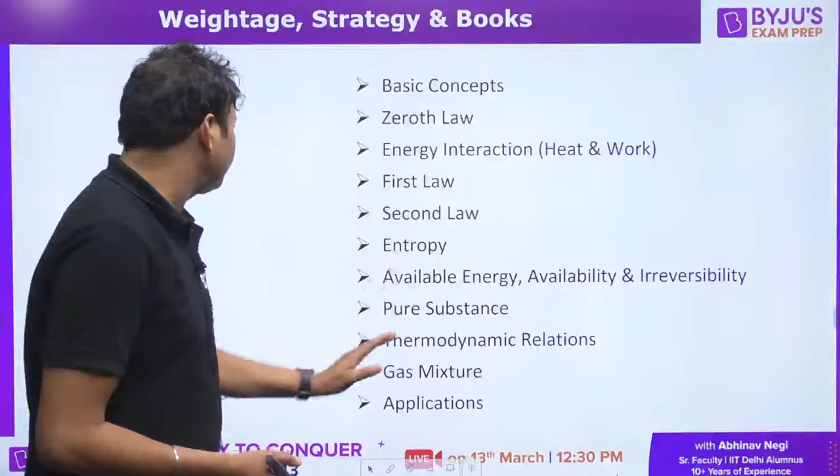Yes, so first of all, I will talk about the reference books which are important for covering your syllabus for the GATE 2023 examination. You must be knowing about these two books, Yunus A. Cengel and P.K. Nag. These are important for basic thermodynamics. But let me tell you, the problem with thermodynamics or the thermal engineering syllabus is, for the engineering services examination, the syllabus is comparatively vast.

Because the application involves different subjects like RAC, power plant, and IC engine. But in the GATE examination, it is only one subject, that is thermodynamics and its applications. So do you need to study the topic RAC from a separate book? Do you need to study IC engine from a separate book? Do you need to study power plant from a separate book? That is the question most students have, those who are preparing for GATE or ESE examination.

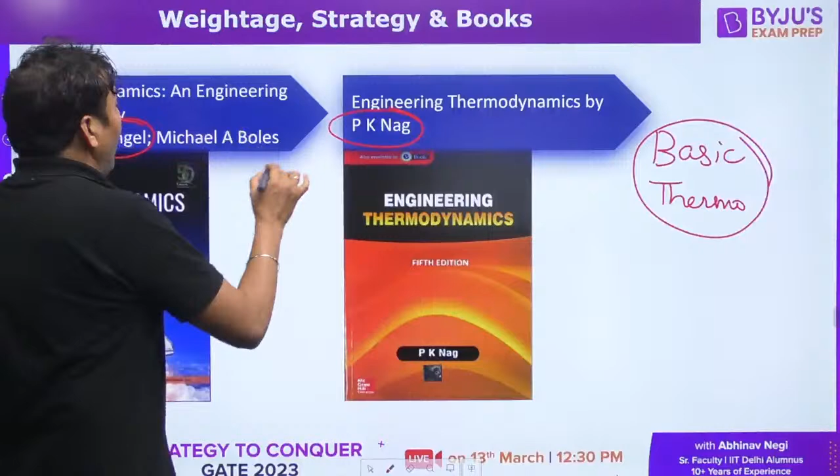Let me make this very clear. Those who are preparing for the engineering services examination need to prepare thoroughly. RAC as a complete subject should be prepared thoroughly. Power plant, IC engine need to be prepared thoroughly. That requires a complete book dedicated to a particular subject, be it RAC or IC engine or power plant. But those who are preparing for GATE examination, no need to waste your time studying RAC from a separate book, or power plant from a separate book, or IC engine from a separate book. My suggestion to everyone is you can use any of these books to cover

basic thermodynamics and applications. Mostly in the application part, the various working cycles are asked, and the rest of the subjects will be covered. There are topics on RAC, the concept of RAC is also there in both of the books. The concept of IC engine is also there. The topic is cycles, various thermodynamic cycles like Otto cycle, diesel cycle, refrigeration cycles, and power plant cycles. So you should prepare for the various cycles in the application part. That is what is covered in these books, right? So do not waste your time having a different book for a different application.

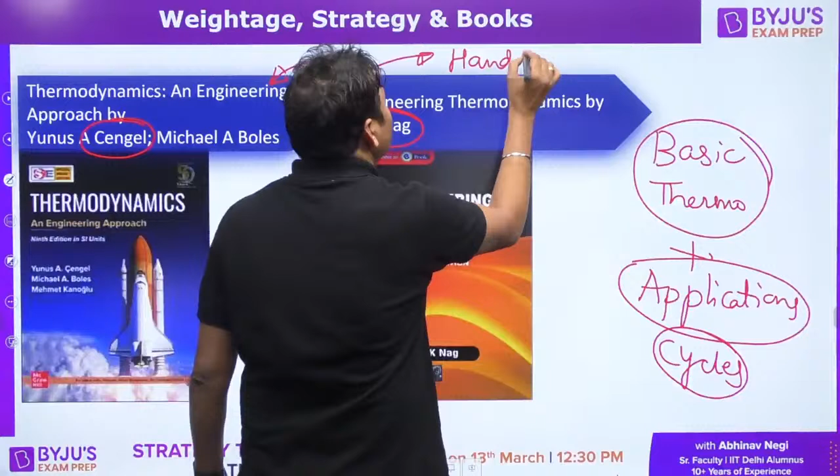Got it? And most importantly, you do not need to refer to any of the books if you have your own handwritten notes. Nothing can beat or match your own handwritten notes. So prepare your handwritten notes from different books. Then you do not have to carry a book for a particular subject. You should always revise from your handwritten notes, and you can make short notes out of this only.

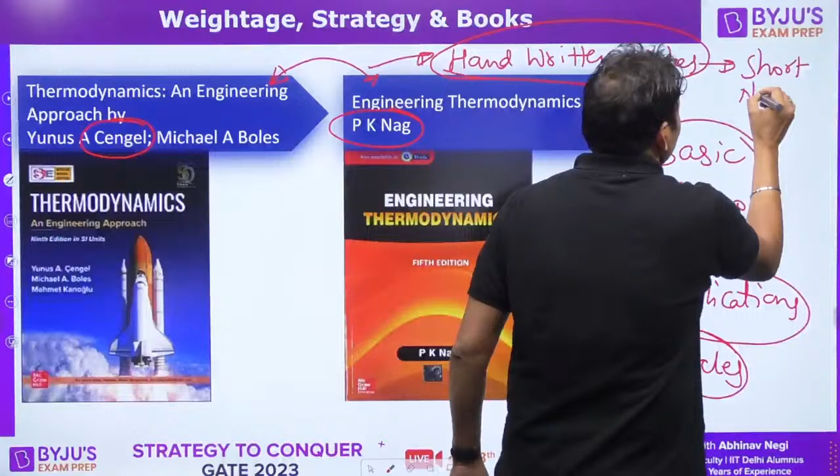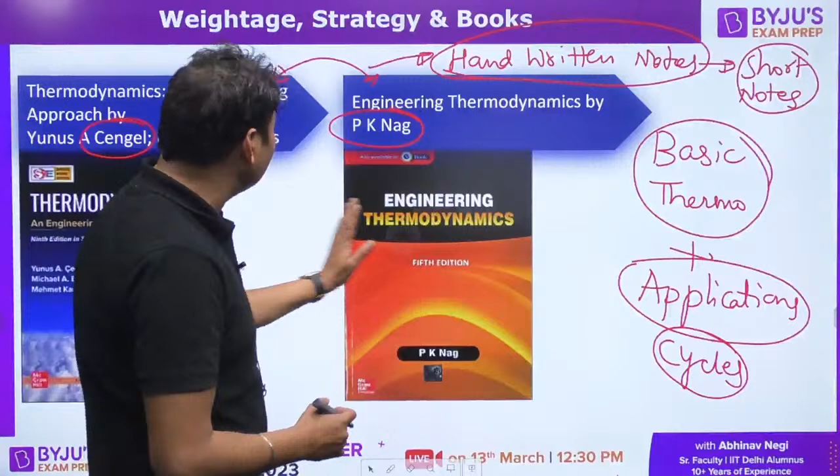So if you see the interviews of all the successful candidates, one thing is very common among everyone, that is everyone carries their own handwritten notes. That is very important. If you have them, well and good. If you have not prepared them, if you are not in the habit of preparing notes, then you should start developing that habit if you are preparing for GATE 23 examination. So I am showing you different books for the application also, but they are for the engineering services examination, ESE.

One more thing I want to tell you: for RAC, you can refer to CP Arora. For IC engine, the authors are ML Mathur and RP Sharma. And for power plant, Ganesan or Khajuria and Dubey.

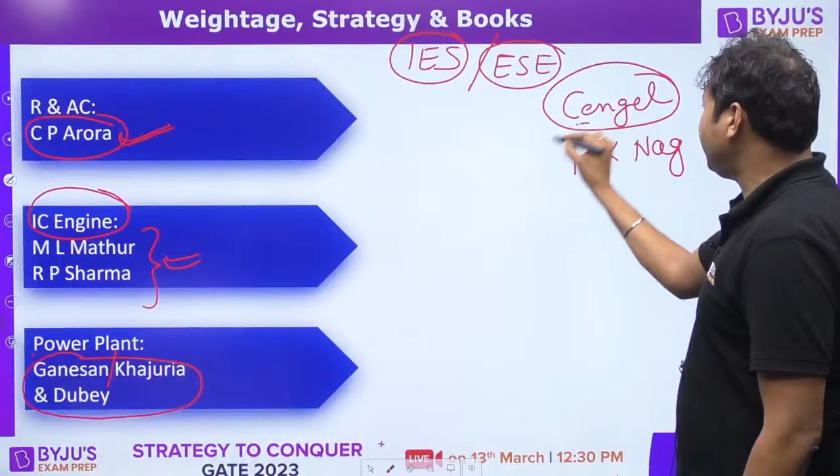Let me make this very clear. For thermodynamics, I have suggested two books: one is Cengel, another is PK Nag. Which book do you prefer? Is anybody studying from any of these books? Which books did you study from during college?

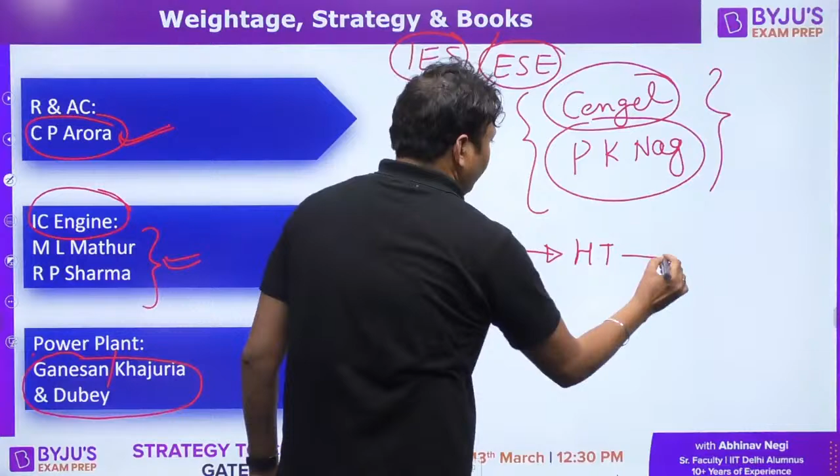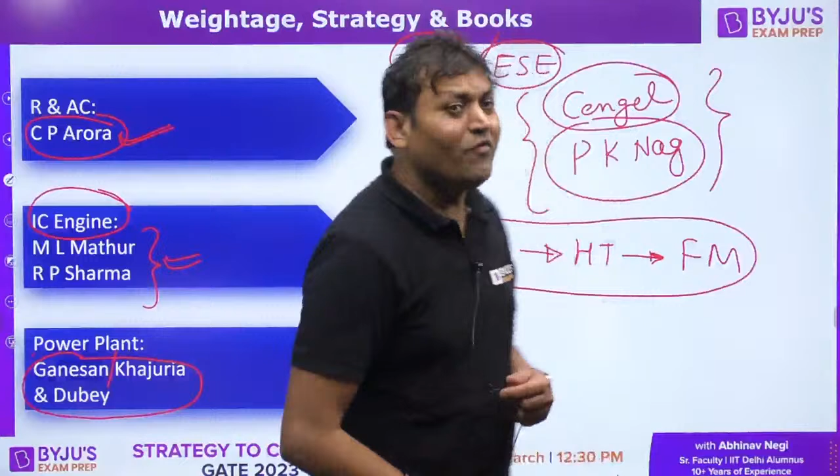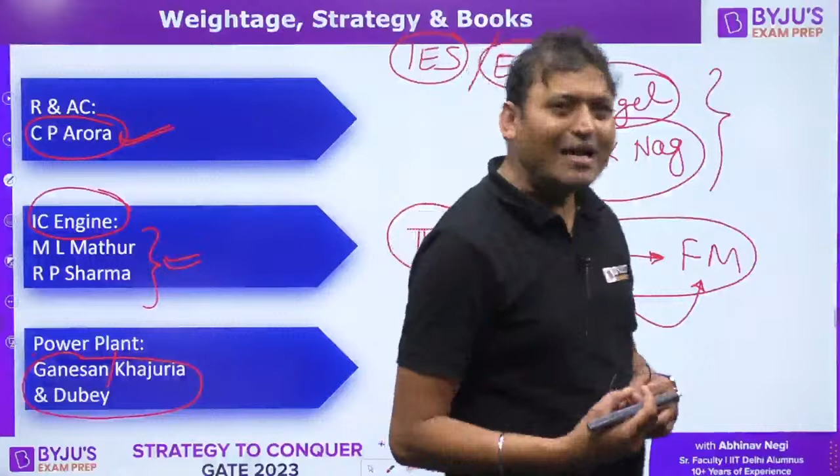One more important thing: thermodynamics, heat transfer, and fluid mechanics—these three subjects have a close connection with each other, and GATE always prefers questions which contain the concept of two or more subjects, so as to check your understanding about the connection between different topics of mechanical engineering. There are only 65 questions and the syllabus is vast, so it's very difficult to frame questions from each and every topic.

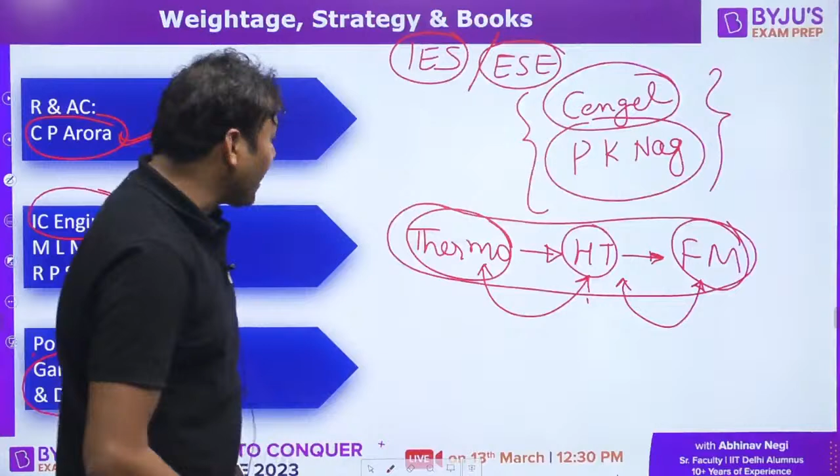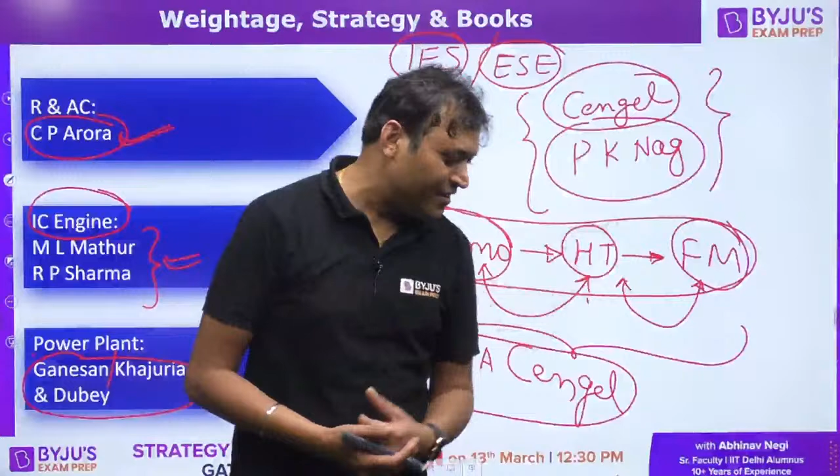So what they do is frame questions combining two or more topics or subjects. Because thermodynamics, heat transfer, and fluid mechanics are closely related with each other, I would suggest you guys refer to Yunus A. Cengel. If you prefer a reference book written by one author for all these subjects, you will be able to see the connection between the subjects. So I always prefer Cengel for thermodynamics, heat transfer, and fluid mechanics. That is what I would recommend everyone to refer to, Cengel if possible.

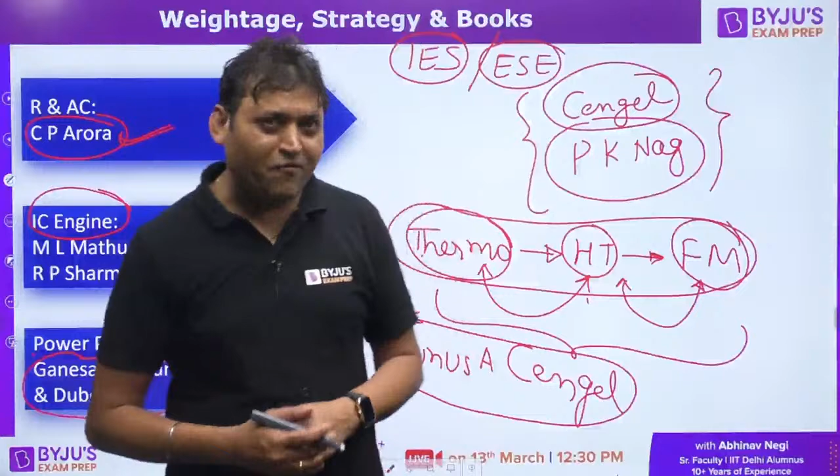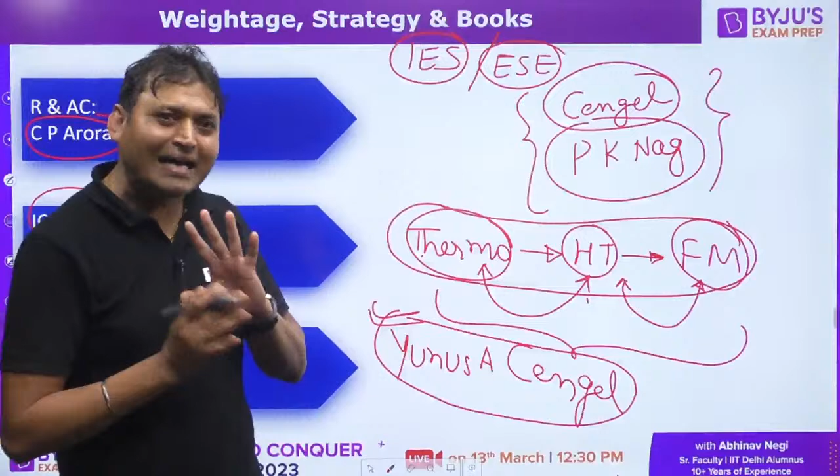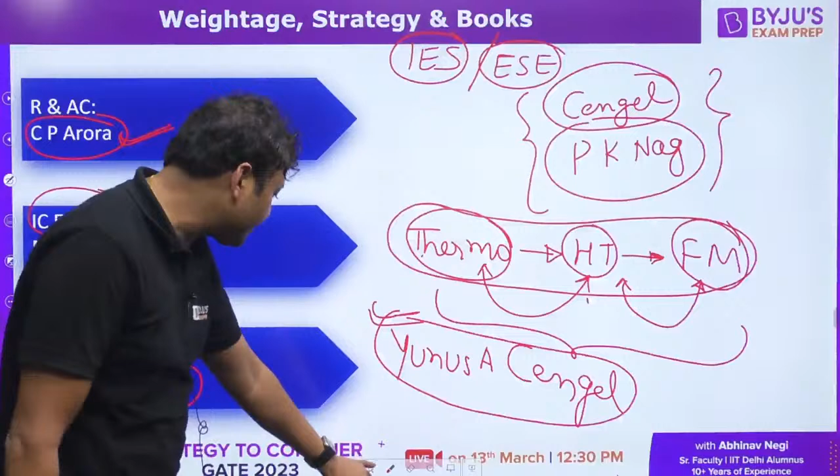If you are already studying from PK Nag and are comfortable with that, there is no harm in that, because content-wise all the books are the same. Each and every book has the same content; the only difference is the way of presentation. So I always prefer Cengel for thermodynamics, heat transfer, and fluid mechanics, and I would recommend you follow these books if possible. And do not forget to make your handwritten notes.

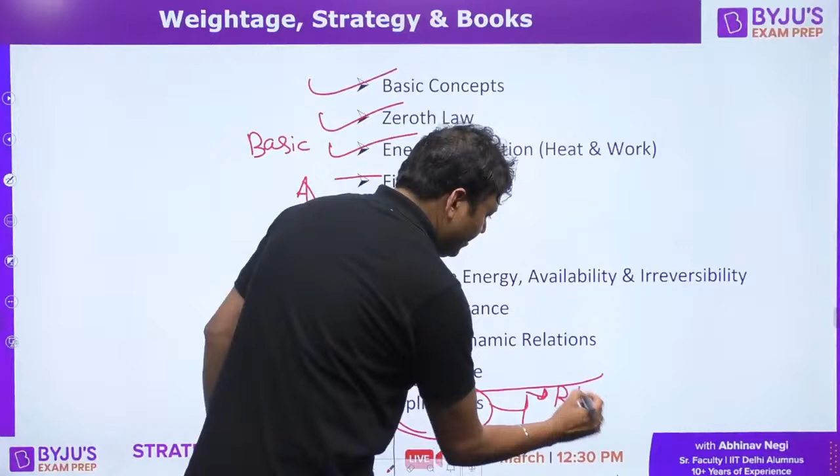This is the entire syllabus: basic concepts, zeroth law, energy interaction, first law, second law, entropy, available energy, pure substance, thermodynamic relations, gas mixture. These are basic thermodynamics. This is basic, and this is applied thermodynamics. Application involves RAC, power plant, and IC engine.

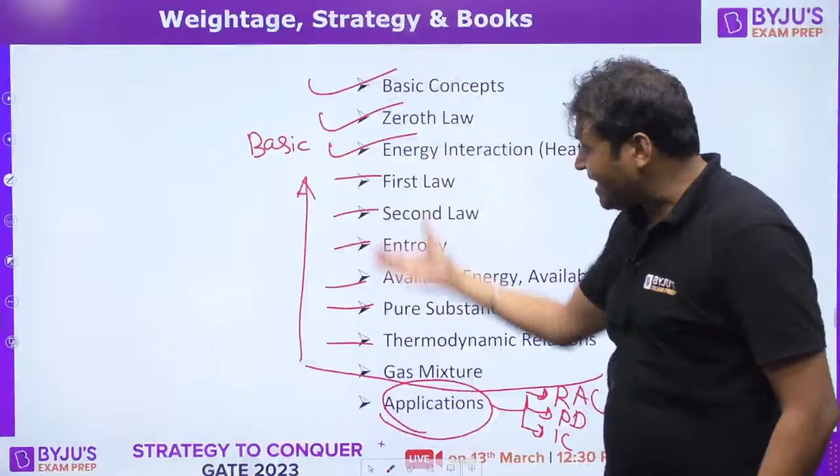Without understanding the basics, you will not be able to understand the application. Even though the weightage of basics is not that great, without understanding them you will not be able to solve questions from the application part. That is why basic thermodynamics becomes more important, a prerequisite for completing your understanding of applied thermodynamics.

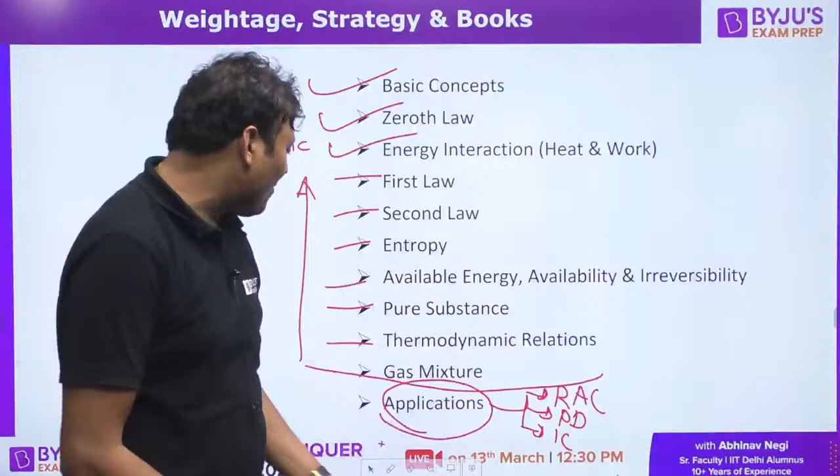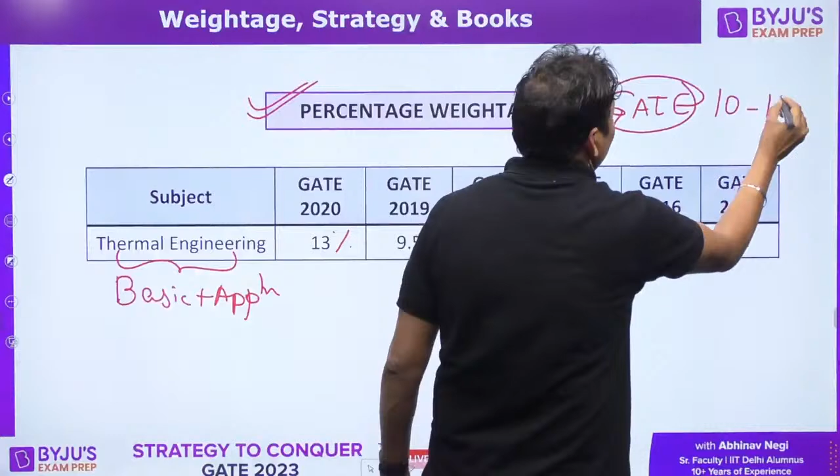Let us see the weightage, to know how much effort you should make to revise or study thermodynamics, depending on its percentage weightage in the GATE examination. As you can see, thermal engineering, which involves basic plus applied, carries around 10 to 15% in GATE, a very high weightage compared to other subjects. The subject is very simple, easy to understand, and highly scoring. If you prepare in the right direction with the right strategy, you will definitely enjoy it. It is very interesting, and you will be able to get maximum marks.

The percentage is increasing because thermodynamics is one of the basic subjects in mechanical engineering, so more weightage is given to subjects which are basic. GATE gives more weightage to subjects that are more fundamental, like strength of materials. We studied thermodynamics in school as well, in 11th and 12th grade. Similarly, strength of materials and fluid mechanics are basic subjects you need to understand for any competitive examination.

This is actually the marks weightage in GATE 2021. The questions were asked for 11 marks in the first slot and for 13 marks in another. These are the marks.

In 2019, 18 marks, 9 marks. So what I want to make clear here is the percentage weightage is continuously increasing from previous years. 2021 was having almost the highest weightage among all the previous years.

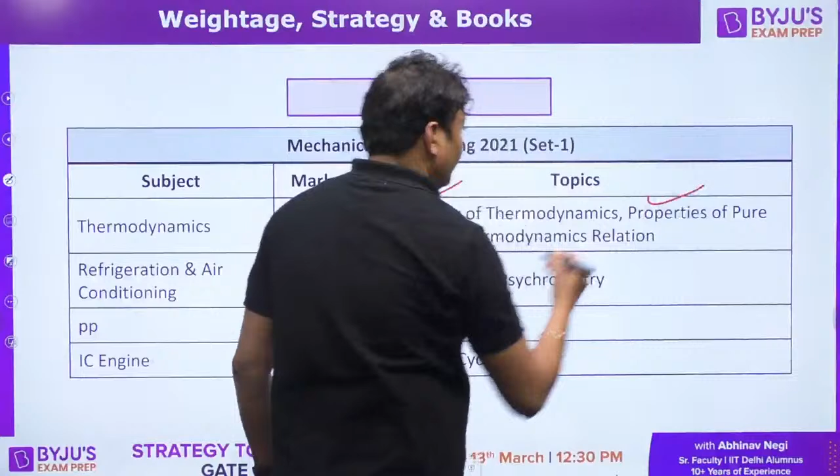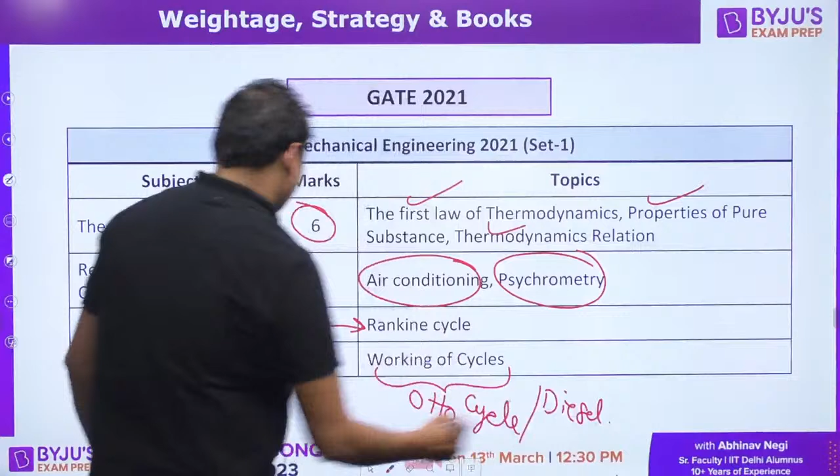The topics from which questions were asked in 2021: basic thermodynamics, 6 marks, covering properties of pure substance and thermodynamic relationships. Also RAC, air conditioning and psychrometry, power plant Rankine cycle, and IC engine working cycles like Otto cycle and diesel cycle. This is how the marks distribution was in GATE 2021.

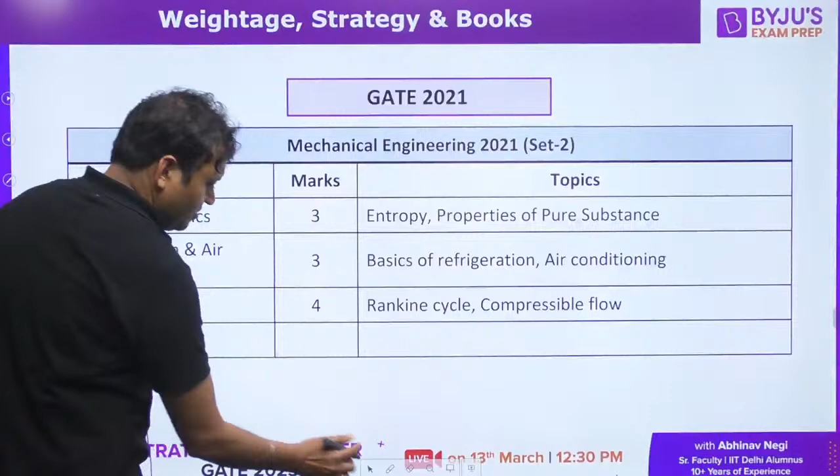In Set 2, again there was no question from certain topics. You can see these were the topics from which questions were asked. Normally the questions are asked from the first law, the second law, entropy, and applications of thermodynamics.

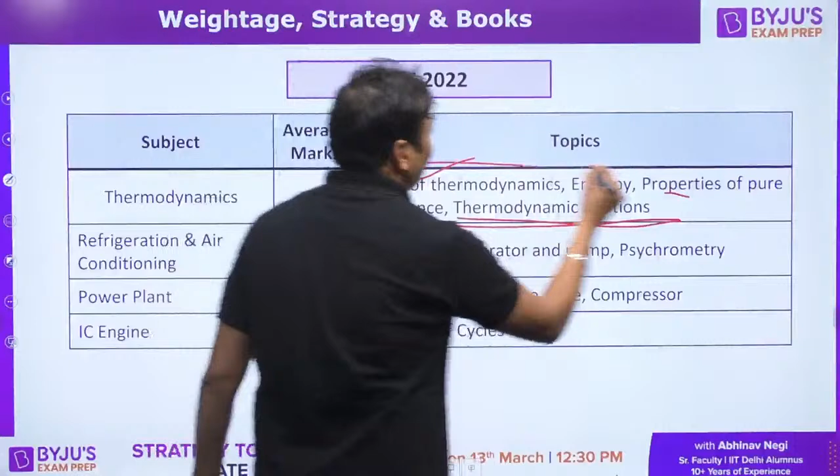This is about the 2022 exam. This is the total marks, around 13 marks. Again in the 2022 examination, thermodynamics and applications contained 13 marks, including laws of thermodynamics, first law and second law, entropy, and properties of pure substance. You can see these topics getting repeated.

4.5 marks for thermodynamics on average - it is actually the average marks.

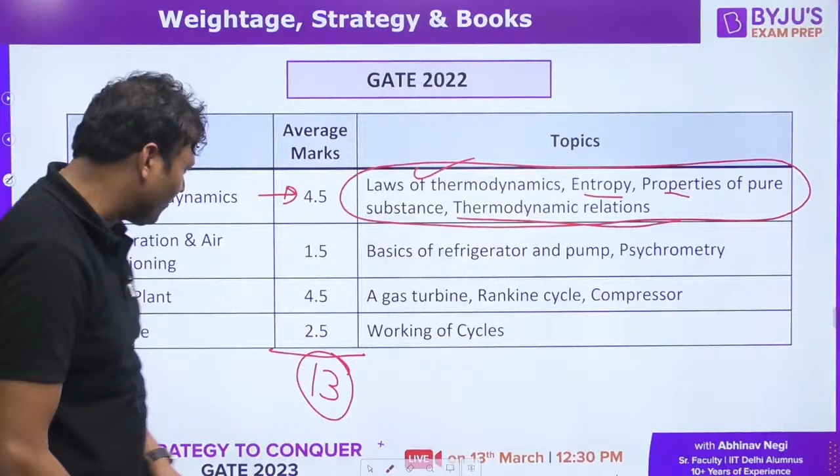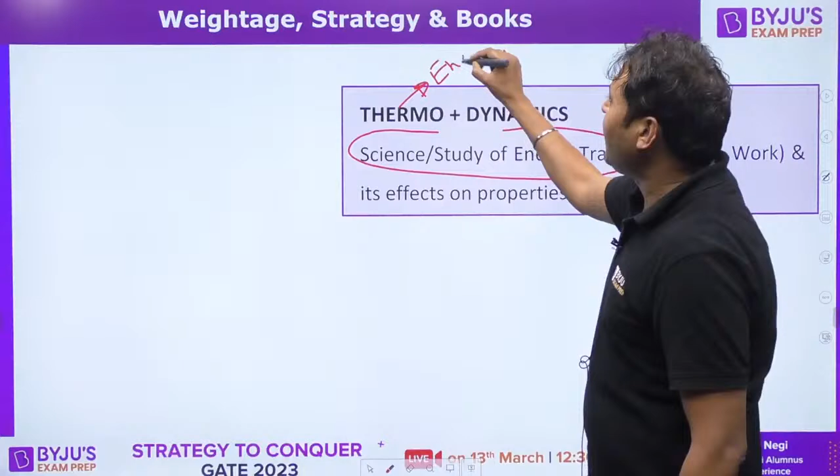Now in thermodynamics, what we actually do is, thermodynamics is the science of energy, the science of energy transfer. Thermo means energy and dynamics means motion. So energy in motion, the analysis of energy in motion, and the effect of this energy in motion on the properties of the system - that is what we study. How does energy transfer take place? Either in the form of heat or work. So here, thermodynamics is all about the fight between heat and work.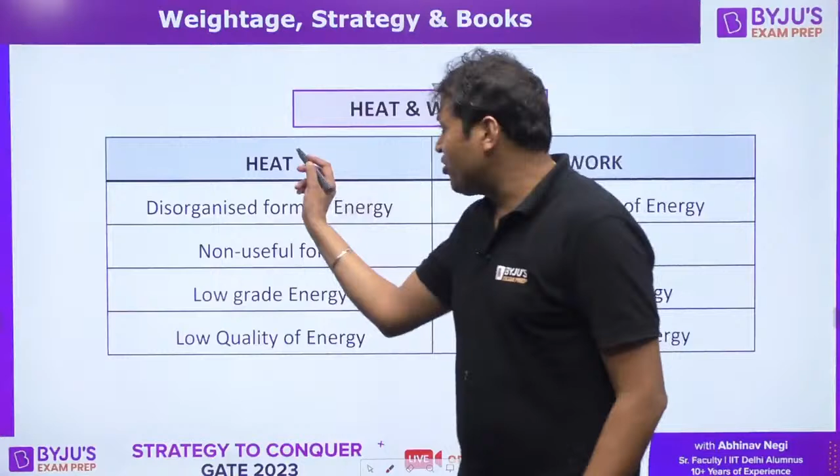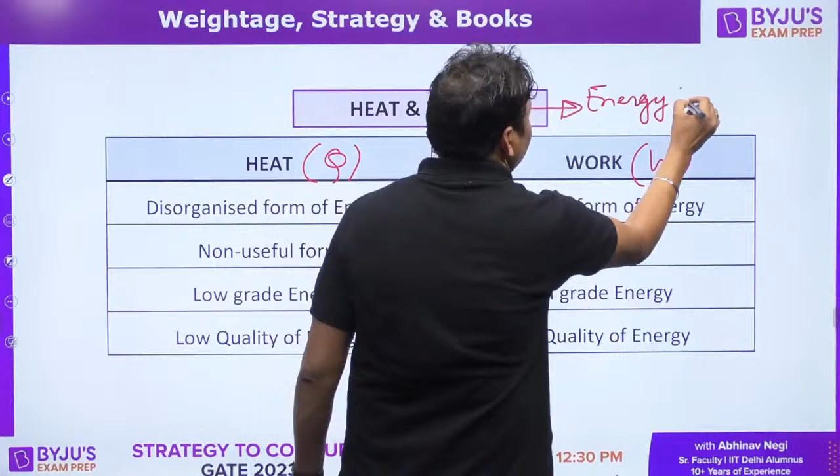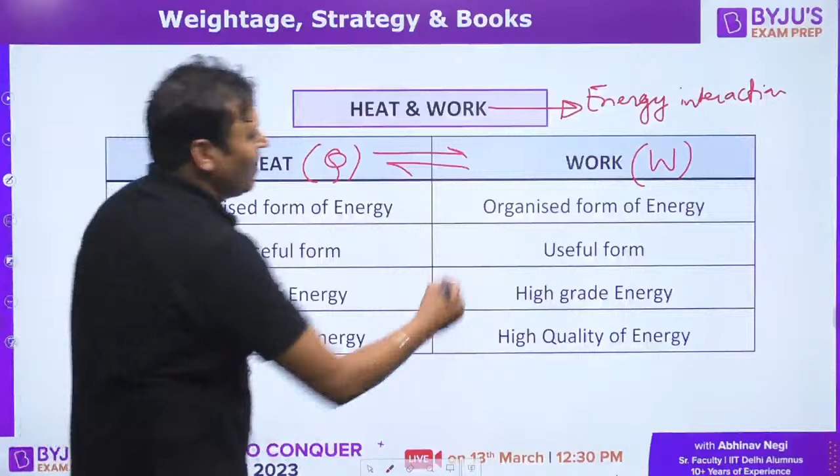Thermodynamics is all about the battle between heat and work. There is a basic difference between heat and work. You already know, but I am giving you a little idea. Heat and work are the energy interactions between system and surrounding, and we have the conversion of heat into work or work into heat - that is all thermodynamics is about. Heat is a disorganized form of energy while work is an organized form of energy. Heat is a non-useful form of energy whereas work is useful. Heat is called low grade, work is called high grade energy, and heat is of low quality while work is of high quality energy. These are the basic differences, and that is what we are going to study in the whole of thermodynamics.

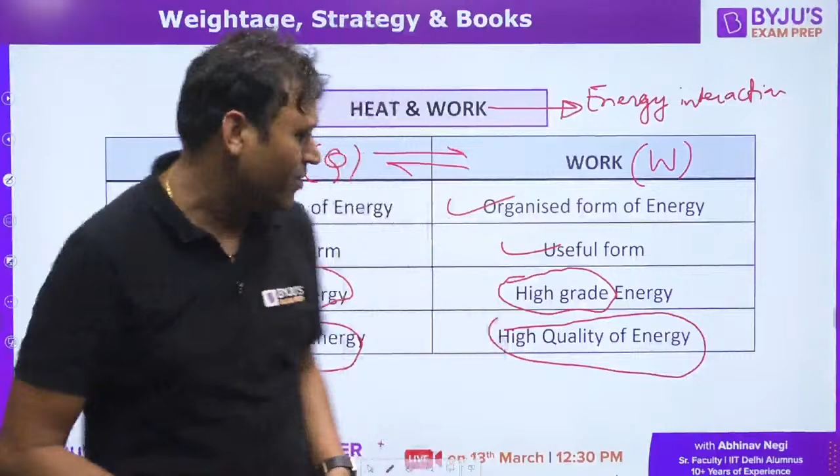Now, I am not discussing thermodynamics as such today, but giving you an idea of what thermodynamics is all about. It is the science of energy transfer. Energy in motion is nothing but thermodynamics, and energy in motion is of two types: one is heat, another is work. So the concept of thermodynamics is all about the comparison between heat and work - how to convert heat into work, how to convert work into heat.

Now, if you are going to study any subject in mechanical engineering, it is very important for you to understand units and dimensions. Can you let me know the answer to this question: the weighing machine, what does it read? Does it read weight or mass?

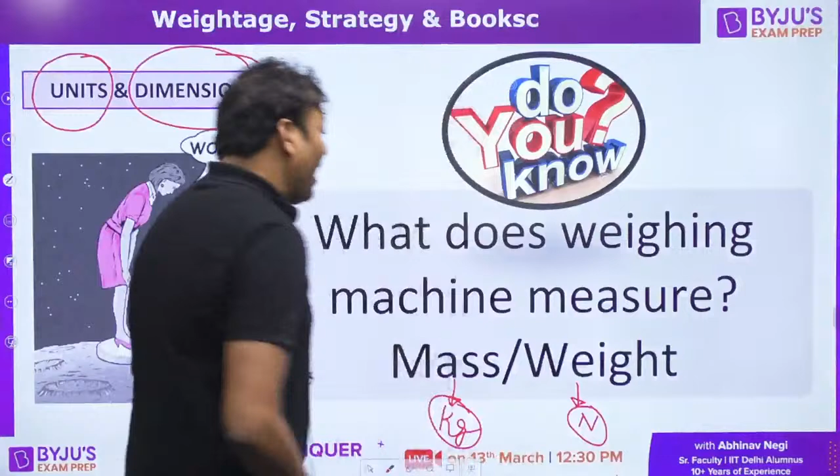Mass has the unit kilogram. Weight has the unit Newton. You should know the unit of different parameters as well as how to convert one unit into another. I am waiting for your response - the weighing machine, what does it read?

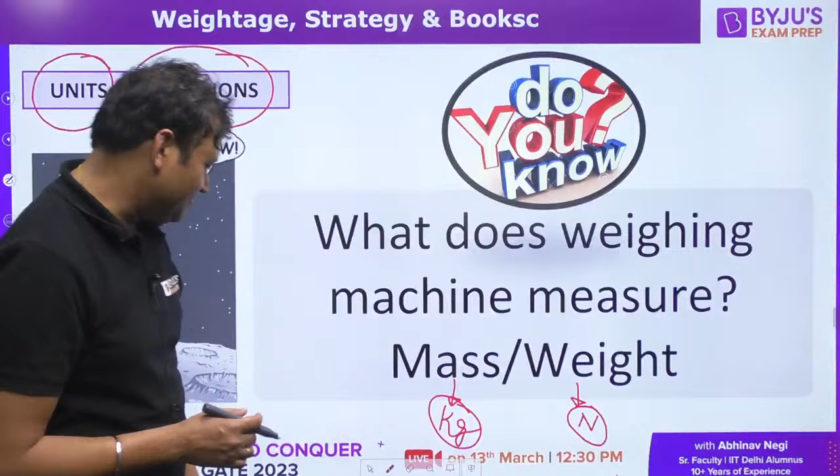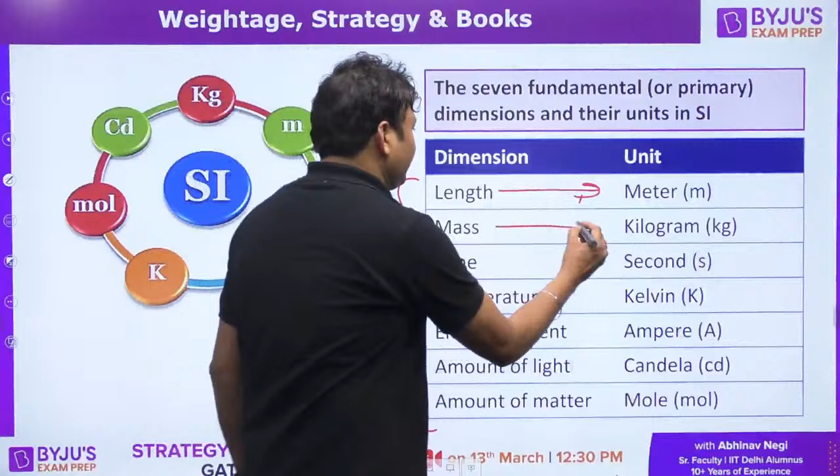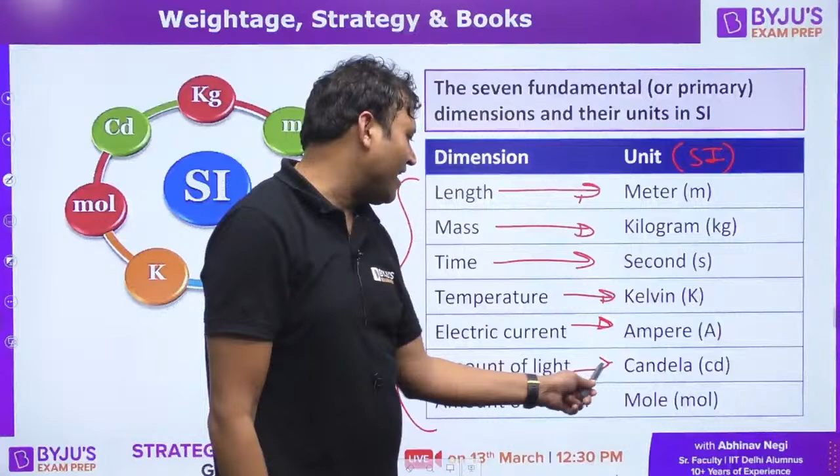These are the basic fundamental dimensions you should know. The SI unit for these fundamental dimensions: length, mass in kilogram, time in second, temperature has Kelvin as the SI unit. Current is ampere, amount of light is candela, and amount of matter.

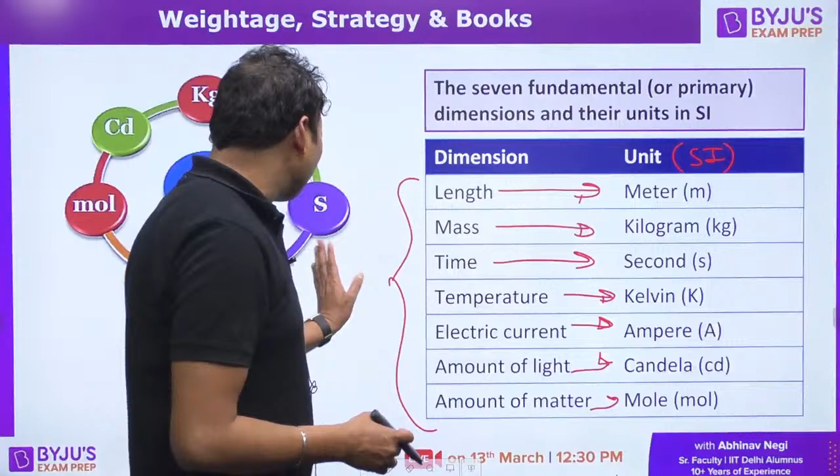Weighing machine always reads weight, not mass. So many students had mentioned mass - that is wrong. Weighing machine always measures weight; that is why it is called a weighing machine, because it measures weight. So the unit is not actually kg, we are getting kgf, which is the unit of force, and 1 kgf equals 9.81 Newton. That is what you need to understand, how to convert one unit into another. So it is kilogram force which is the reading of the weighing machine. If your weighing machine reads 60 kg, we use kg, but it is not kg actually, it is kgf. So 60 into 9.81 Newton is your weight, or the gravity force acting upon you.

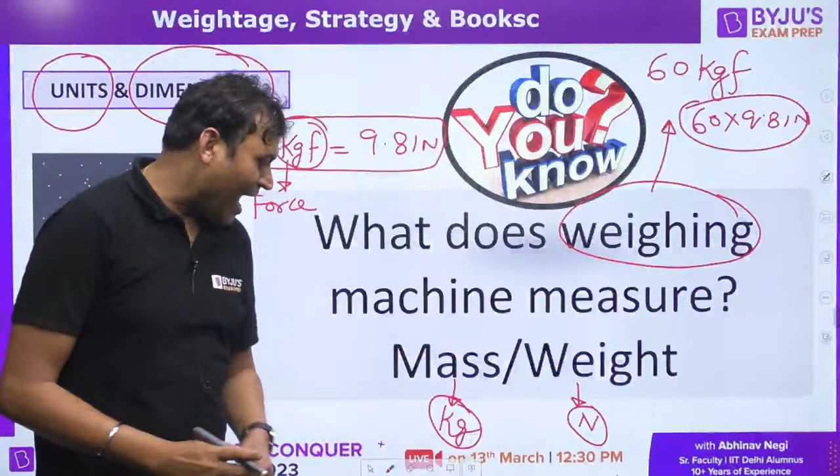So these are some of the basic fundamental dimensions, and you should be able to convert these prefixes. For an example, kilo. If you convert kilometer into meter, it will be 10 to the power 3. Similarly, megapascal is 10 to the power 6 pascal.

These also you need to understand. For units, two things are very, very important. One is the understanding of the unit, conversion of one unit into another, and the understanding of SI unit.

For an example, if I ask you, the ideal gas equation is PV equals MRT equals NR bar T. Do you know this ideal gas equation? What is this R and what is this R bar? Do you see any difference between R or R bar? This is the ideal gas equation which we are using in our thermodynamics.

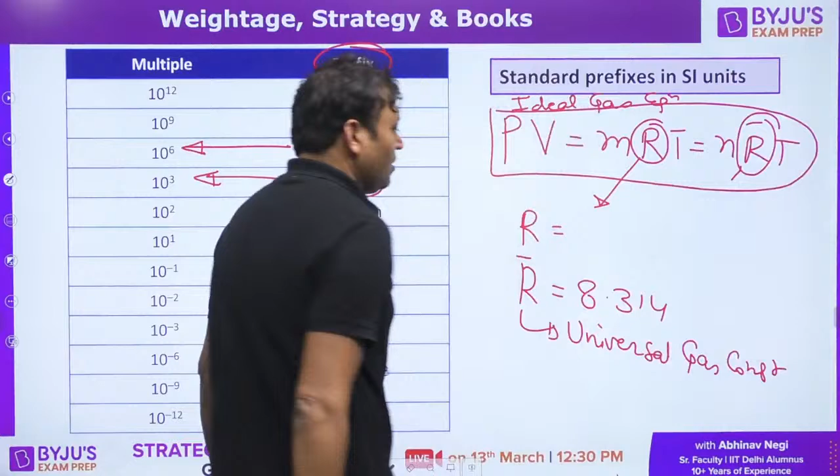What is the difference between R and R bar? Is there any difference? So R bar is 8.314. That is called the universal gas constant. What is the unit? And R is called the specific gas constant, or specific/characteristic gas constant.

R is the characteristic or specific gas constant. The SI unit of R is Joule per kg Kelvin. But the unit of R bar is Joule per mole Kelvin, or we can call it kilojoule per kilomole Kelvin.

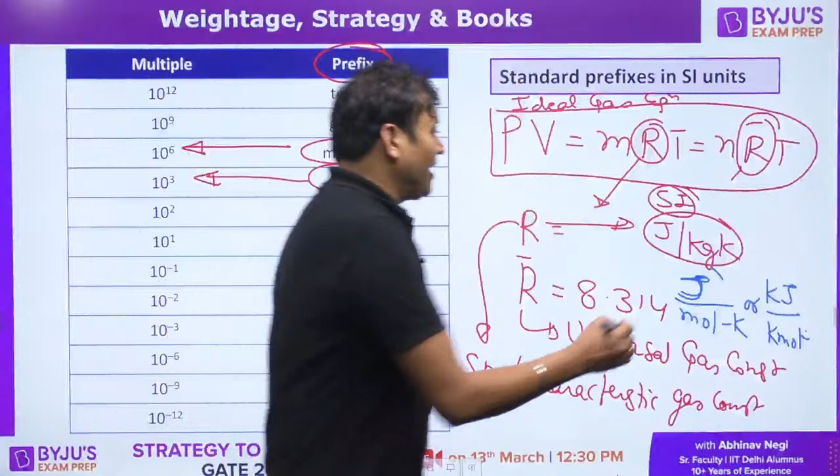This is the difference between R and R bar. If you do not have the understanding of the unit, then you will not be able to convert.

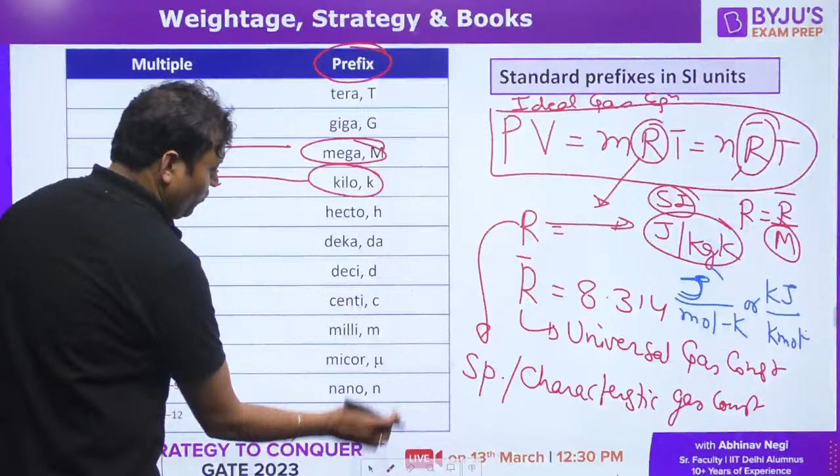So we can say R is equal to R bar divided by molecular weight. And what is molecular weight? What is the unit of molecular weight? Can you let me know the unit of molecular weight? Who will tell me the unit of molecular weight, M?

It is called molecular weight, or we can also call it molar mass. What is the molecular weight of hydrogen? Can you let me know? Who will tell me?

There is an ideal gas law which comes from Boyle's law, Charles's law, and Avogadro's law. There are three laws combined together to make the ideal gas law. According to ideal gas law, PV is directly proportional to T. This is the ideal gas law, because P is inversely proportional to V, that is called Boyle's law. Then comes Charles's law, and then Avogadro's law. So from here we are getting the ideal gas law.

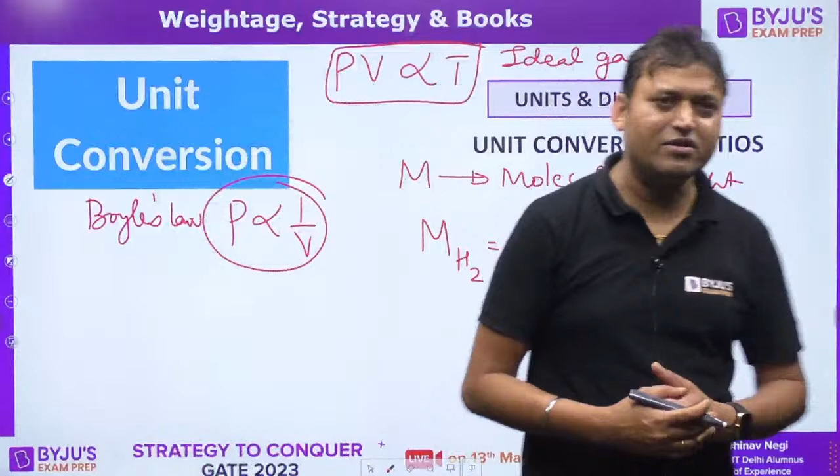What is the molecular weight of hydrogen? What is the unit? Molecular weight of hydrogen is 2. And what is the unit? That is very, very important, that is what I want you to understand.

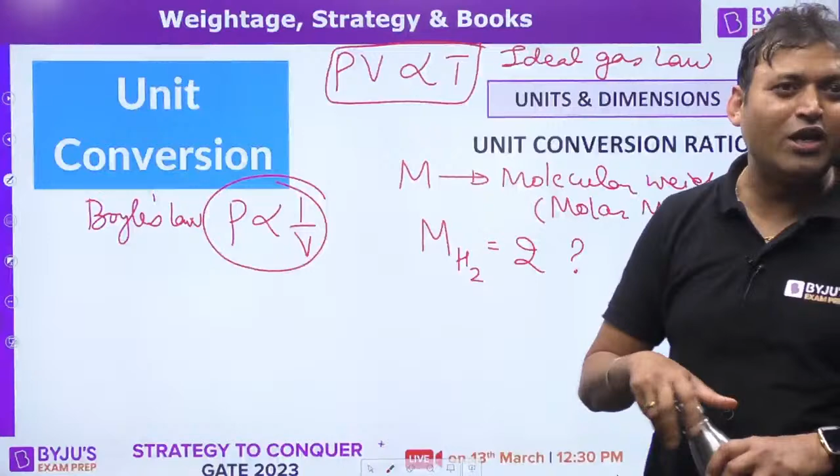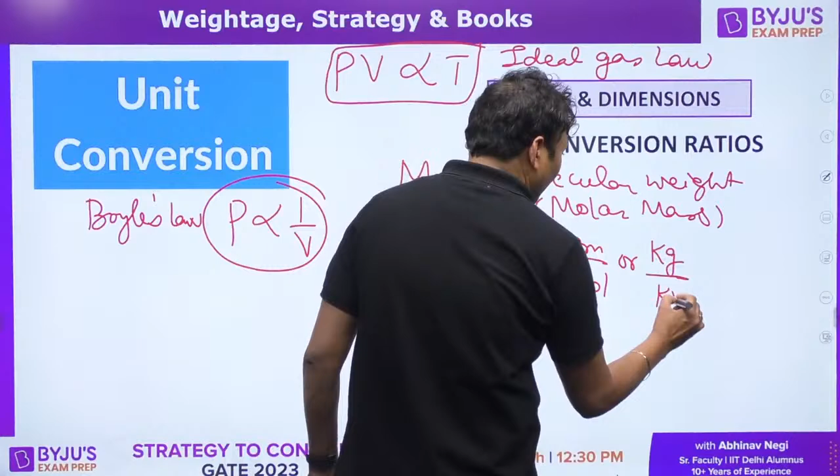People know the molecular weight of hydrogen is 2, but they do not know what is the unit of that 2. What is the unit? It is gram per mole, or we can call it kilogram per kilomole. And if we want to convert into kilogram per mole, then it will be 2/1000 kilogram per mole.

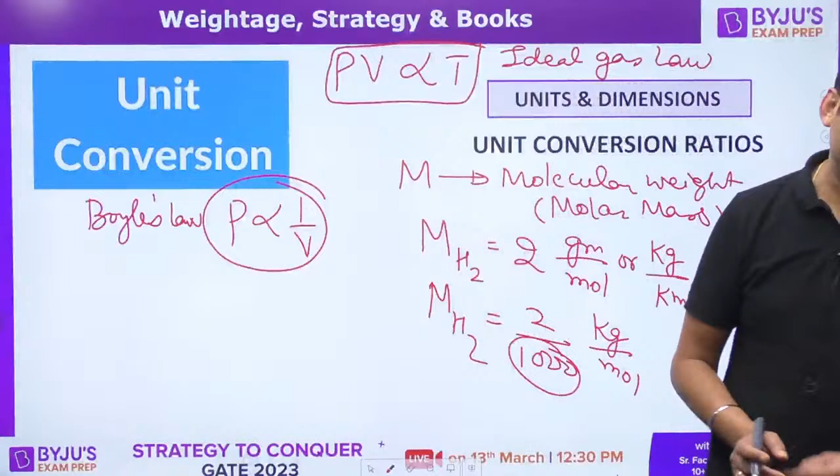That is where students commit mistakes. Whether to divide by 1000 or not will be decided when you have the understanding of the units. Getting it? Is that clear? It is gram per mole, it is not number of moles. 2/1000 kilogram per mole will be the molecular weight of hydrogen.

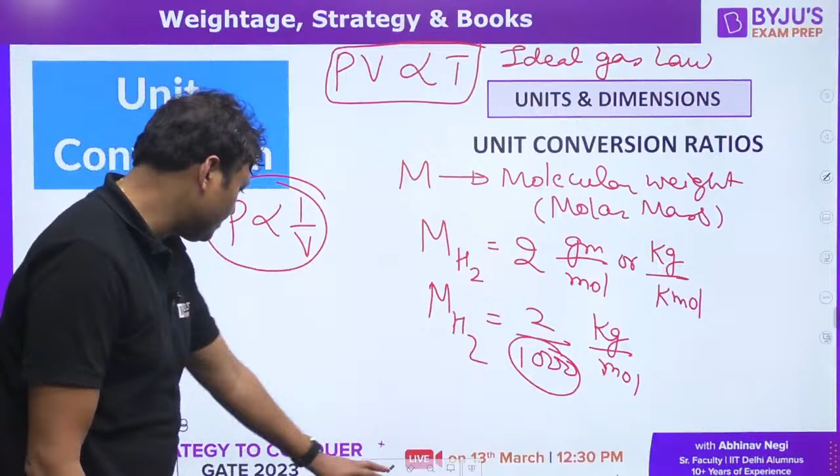And other than this, understanding of unit and dimension, the other important thing is graph theory. For understanding any subject, it is very, very important for you to understand the graph theory. Can you let me know the answer to this question? Which is having more slope on the TS curve? Is it isobaric process or isochoric? Please do let me know your answer to this.

Which is having more slope on the TS curve? Isobaric or isochoric?

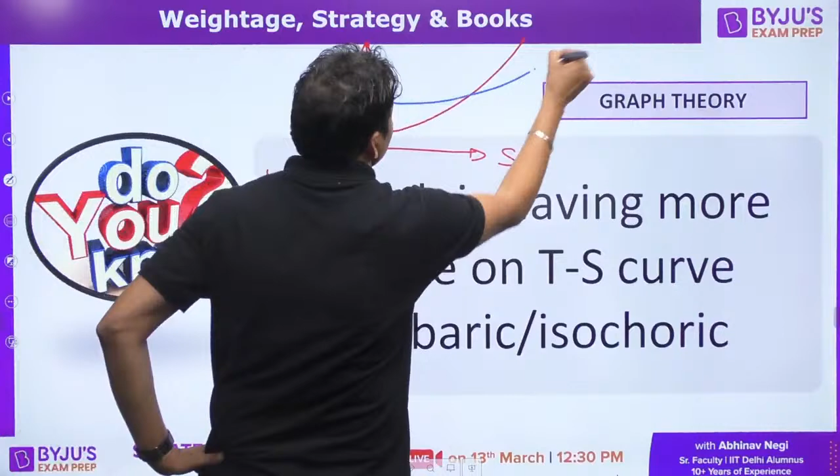If you draw a TS diagram with entropy on one axis, the TS diagram will look like this. This is how the TS diagram will look like.

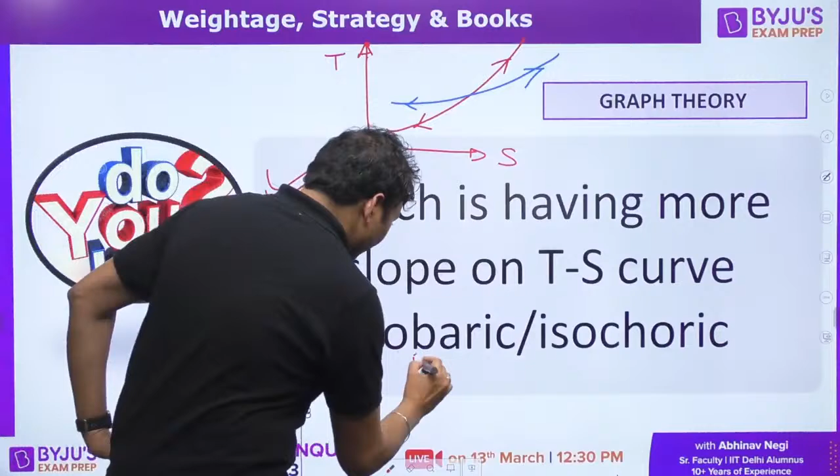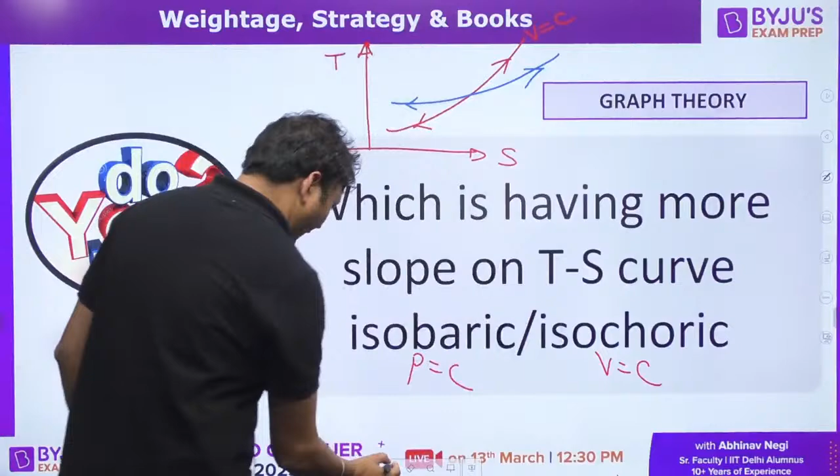So which curve represents isobaric? Isobaric means constant pressure, isochoric means constant volume. Which curve is isobaric, which is isochoric? This one has constant volume, isochoric, and the blue one is isobaric.

Which one has more slope? Which one has more slope? The slope of the red curve is more.

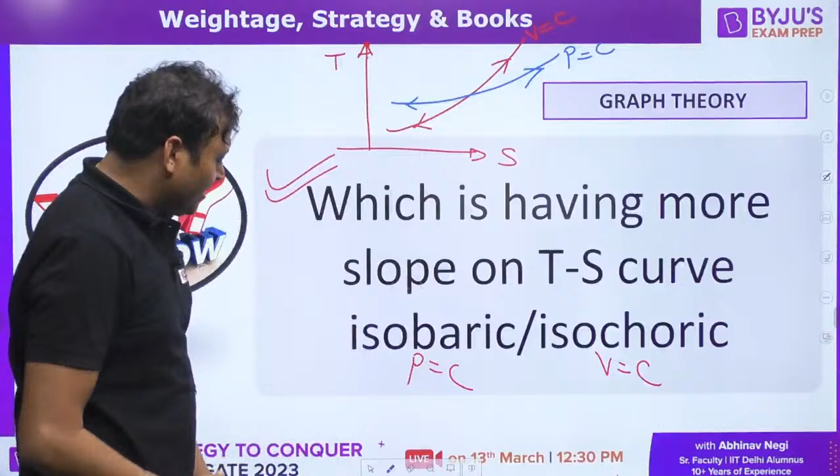How do you understand this? By understanding the concept of graph theory. Let me have a quick discussion about graph theory.

For example, if y is a function of x, then the slope will be dy by dx. That is the slope, or we can call it tan theta. Theta is the angle with the horizontal. That is the slope. If the slope is constant,

then how will the curve look? For a constant slope, the curve will be a straight line like this. For constant slope, the curve will be a straight line.

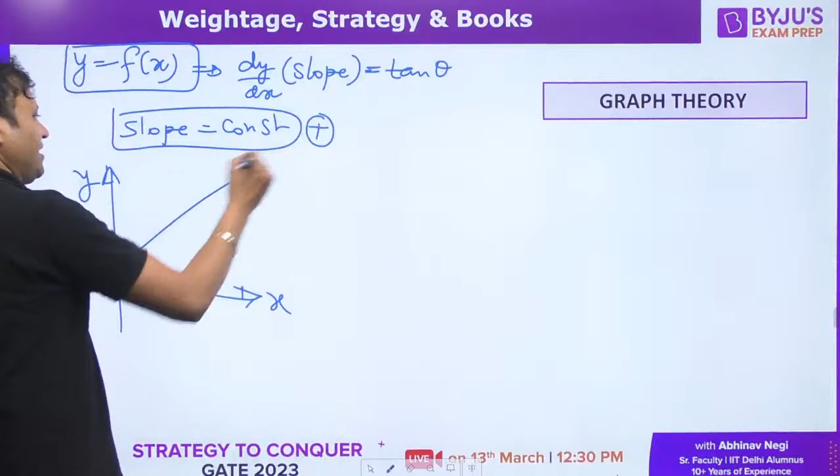So it has a positive slope. The slope is constant and positive, then the straight line will be like this. If the slope is negative and constant, then the curve will be like this. This has the slope constant and negative.

So two things are important: one is the magnitude and the other is the sign. Slope has two things - one is magnitude, another is sign. If the magnitude is constant, then it will be a straight line.

And if it is positive, then the straight line will be like this, going in the first and third quadrant. Tan theta is positive in this quadrant - first and third quadrant like this. This is first quadrant, this is third quadrant. Tan theta will be positive.

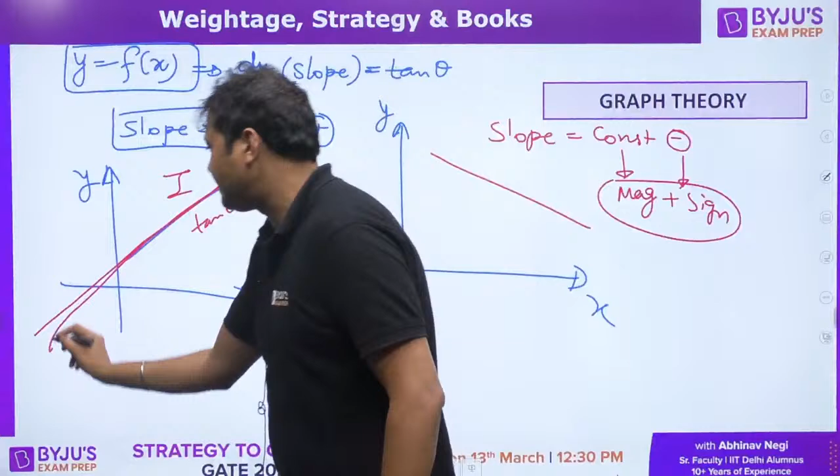But if the slope is negative, it means it is going in the second and fourth quadrant. In the second quadrant tan theta is negative, and in the fourth quadrant tan theta is negative.

So can you let me know, if I draw a curve, can you tell whether the magnitude of the slope is increasing or decreasing? This is a curve between y and x. So do let me know about the slope - what is the magnitude, what is happening to the magnitude and its sign?

Can you let me know the slope - is it increasing with increase in x, or decreasing with increase in x? The slope. Do let me know about the magnitude.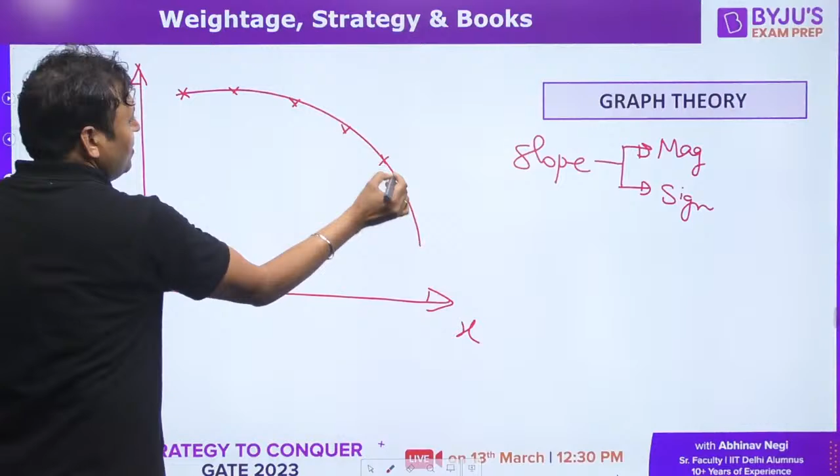You can see as x increases, y is decreasing. As x increases, y is decreasing. So if this is the situation, then the sign is negative. Or we can say if x decreases, if y is increasing, that means the slope has a negative sign. The slope has a negative sign.

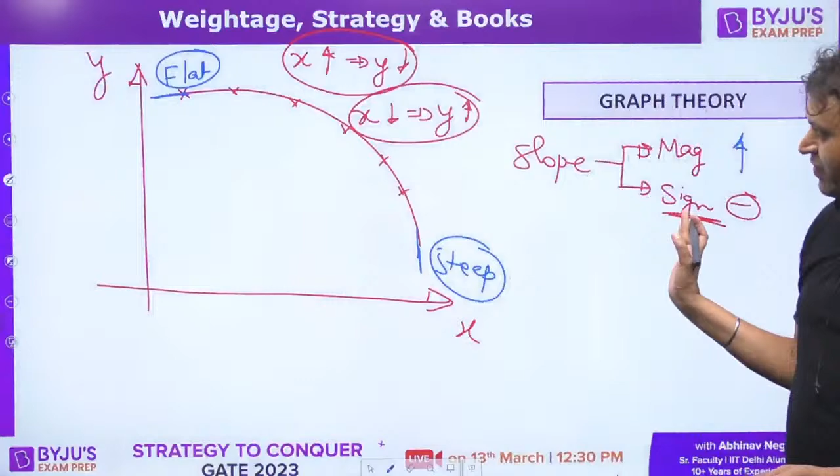But magnitude, how do we see the magnitude? So if the curve is initially flat, it has zero slope, and it becomes steep, it has infinite slope. So the slope is increasing in magnitude and has the negative sign. The slope is increasing in magnitude and has the negative sign. Is this clear to everyone? That is how you need to understand.

If you know the information of the slope, you are able to draw the curve easily. If you know the information about the curve, you will be able to find the slope. I hope it is clear.

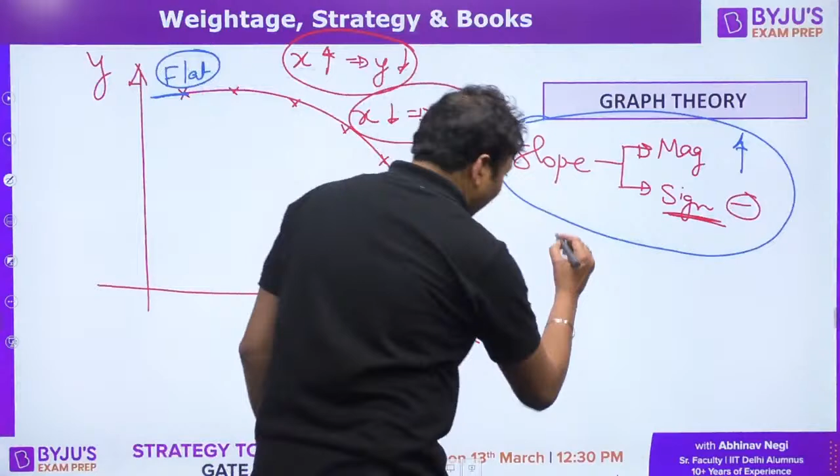So the way I had drawn the curve on the TS diagram, this is TS diagram, this is constant volume. So for constant volume, the slope is positive. What is the slope? Slope is equal to T by CV. That is positive. The slope is positive and increasing. Magnitude of the slope increases.

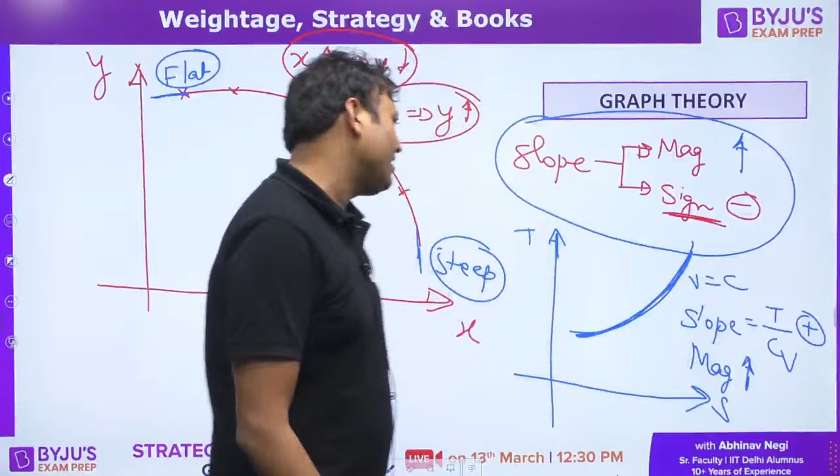That is how the curves are drawn. As temperature increases, magnitude of slope will increase. As temperature decreases, magnitude of slope will decrease, but the nature is positive.

Similarly, can you let me know? What about this curve? What about this curve? Slope of this curve - what about the magnitude, what about the sign? Can you let me know the magnitude? What is happening to the magnitude - is it increasing or decreasing?

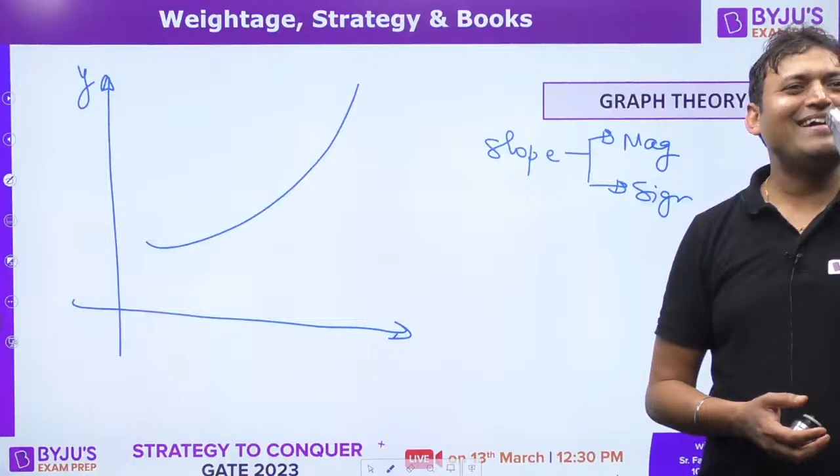Hi Deepak. No, actually I did not join. I did not join IES Engineering Services.

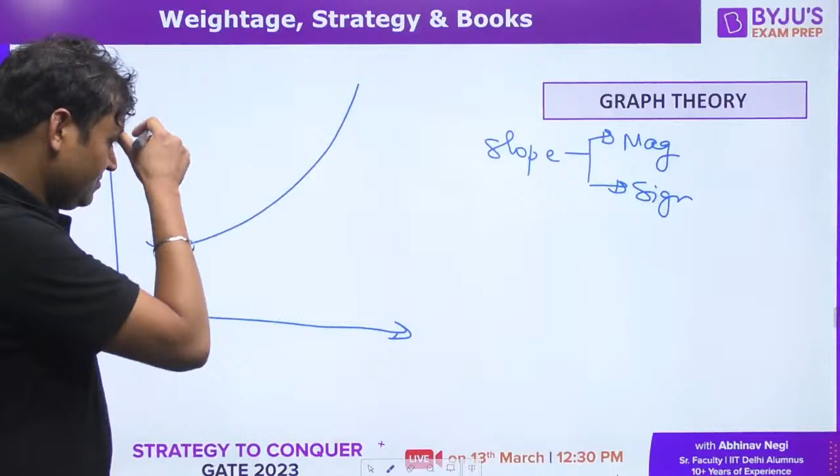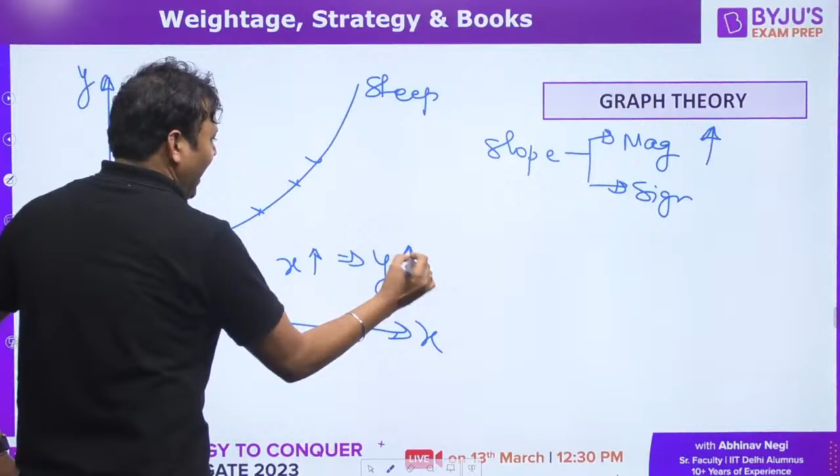So initially it is flat and then it becomes steep, so the magnitude is increasing. And what about the sign? As you can see, as x increases, y is also increasing. If increasing x increases y, then it has a positive slope. The slope is positive and increasing.

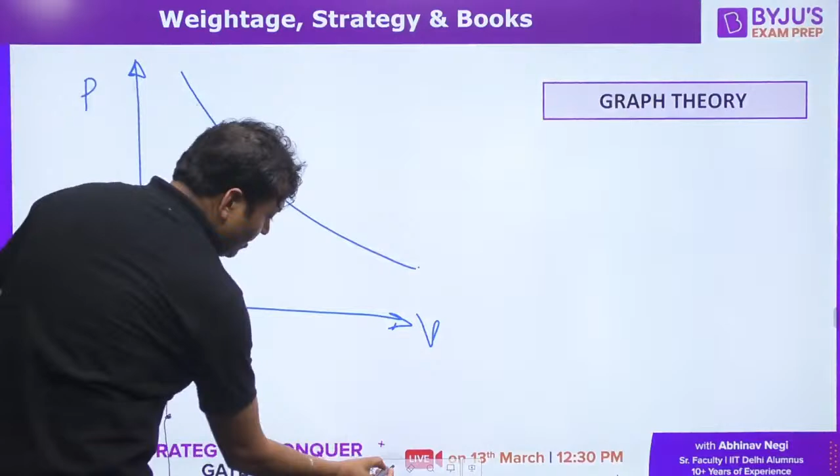So if we draw a PV curve, can you let me know which curve has more slope, the isothermal process or adiabatic process? The PV diagram on the PV curve will be something like this. Which is adiabatic process, which is isothermal process? Can you let me know?

Which is having more slope? We can say slope is negative here. Slope is equal to dP by dV, that is negative. Earlier dt by ds was positive. Slope here is negative, dP by dV is negative. Isothermal process is having lesser slope compared to adiabatic process. On the PV diagram, this is adiabatic. So slope of isothermal process, dP by dV for adiabatic process is greater than dP by dV for isothermal process.

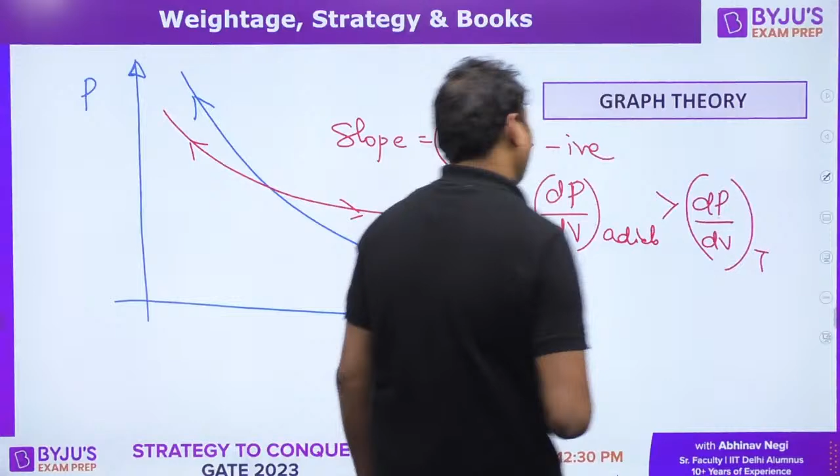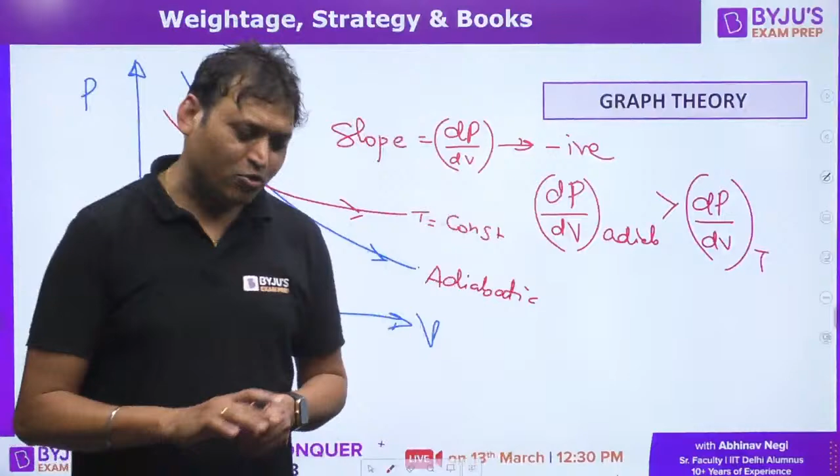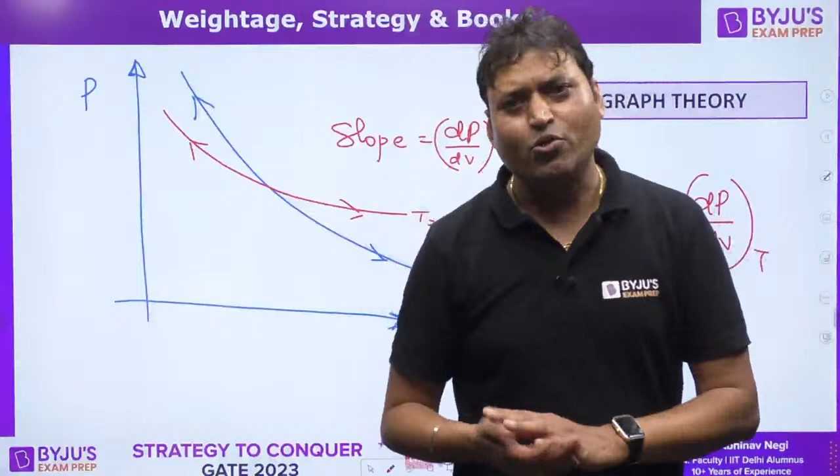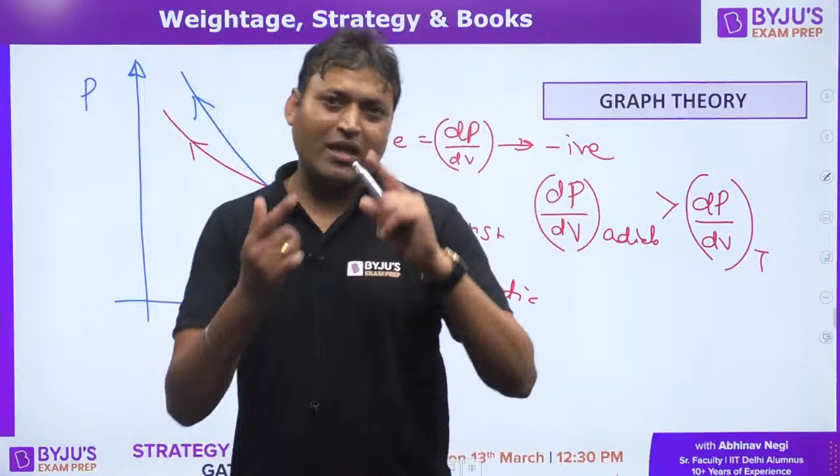Without understanding the concept of graph theory, you will not be able to understand the various processes drawn on PV diagram or TS diagram. So it is very important. Two things are very, very important before starting the thermodynamics subject: one is the knowledge of units and dimension, and the other is graph theory. So before the next session, please revise the concept of units and dimension from any book. The first chapter is generally about units and dimension. If you have Cengel, the first chapter is all about units and dimension. Understanding units and dimension along with graph theory is going to be very helpful. These are helpful tools for understanding the subject.